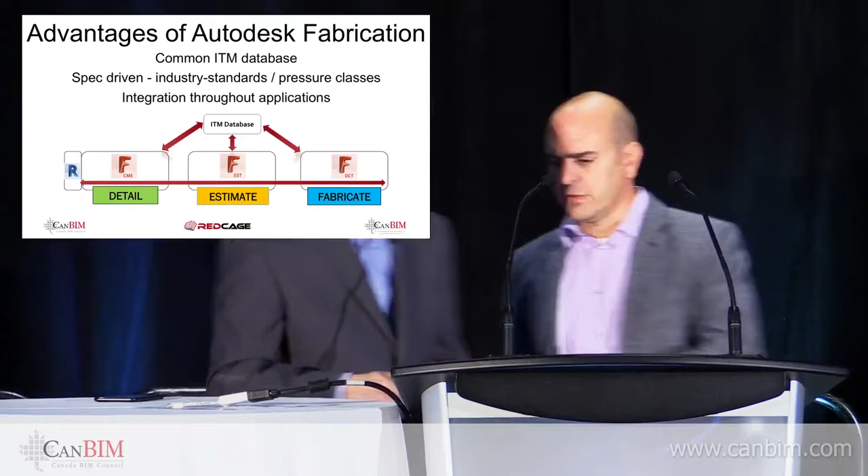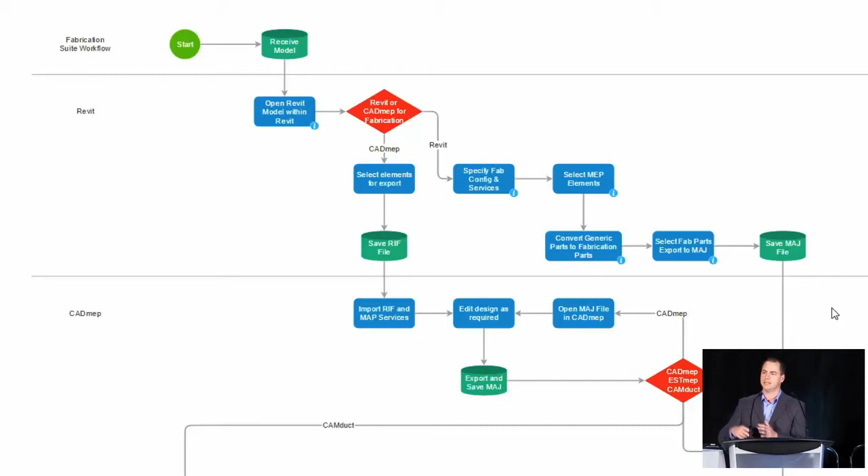So what I'm going to talk about here is the Fabrication Suite workflow, how it gets integrated. You can either use it collectively or independently, so I'll show a bit of both. If you're only an estimator, you could just purchase the estimating side of things. If you're more of a fabricator contractor that uses the detailing side, the estimating side, and the CAM ducting side for fabrication, then you could utilize the whole suite.

So what we have here—oh, it didn't play my video. There's supposed to be a video here, but it's not playing. So I have a video here.

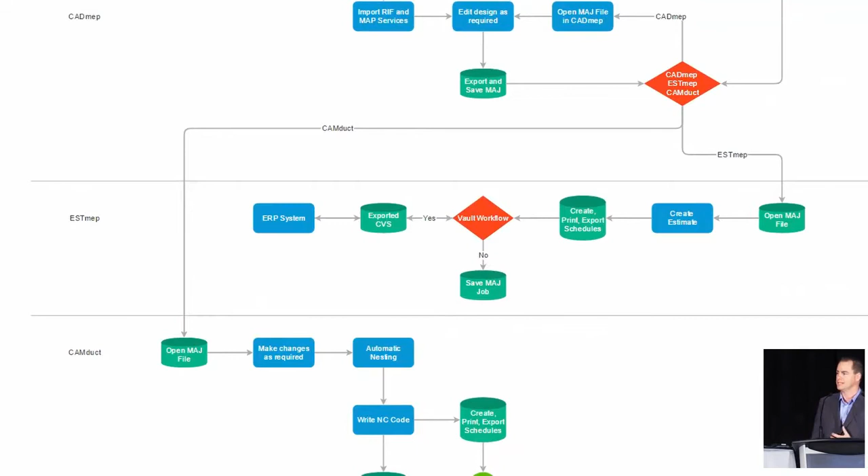Over the time I've worked with some fabrication companies, we've developed a workflow video showing how we can integrate from a Revit workflow to a CAMduct or CADmep workflow to an estimating workflow. What we do is custom tailor these workflows when we work with businesses so they can only focus on one core area. So again, if you're just an estimator, we'd just focus on the estimating side and build a workflow apparent to that.

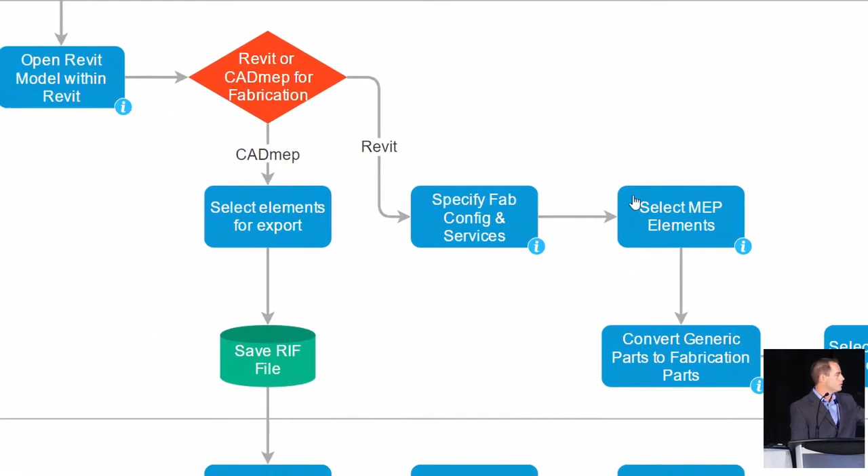This is all cloud-based workflows. If you go into one of these, we'll generate how your users could step by step go through converting fabrication parts and each process of that workflow.

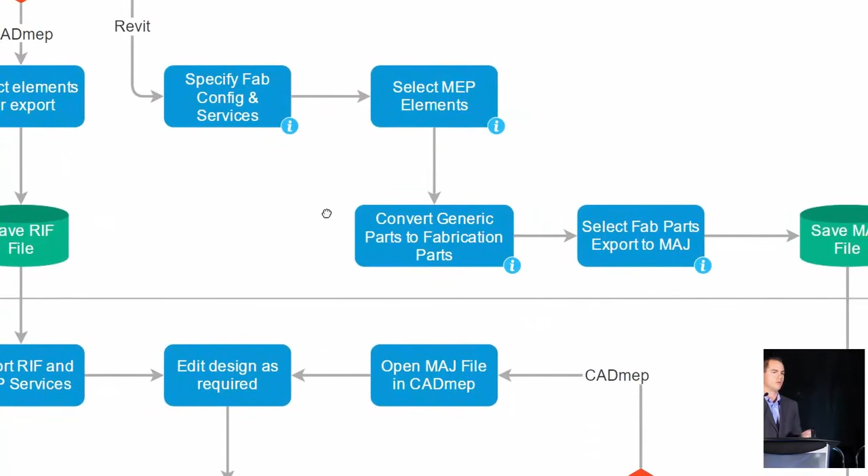So we kind of do this—this is one of the things we do. Instead of just regular CAD training, we do a lot of custom training geared towards your workflows, develop workflows with you, build standards, build templates that will help you propel a lot quicker within your fabrication space.

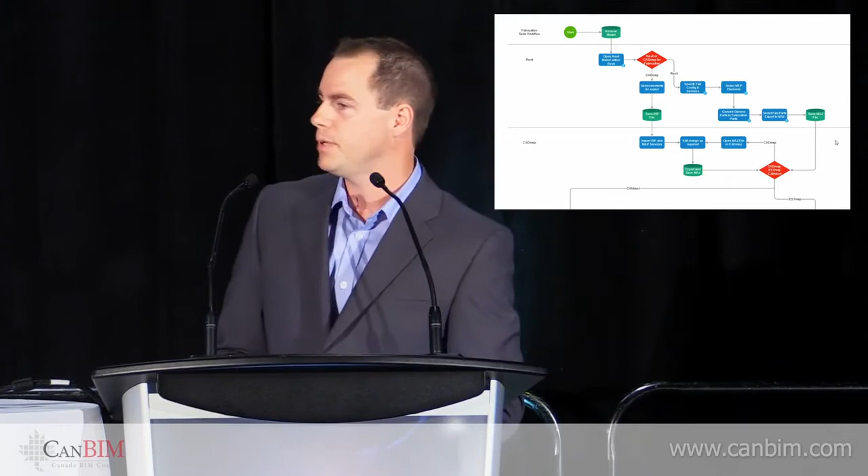The first workflow I'm going to talk about is the Revit Fabrication workflow. Autodesk years back bought a software called MAP Software, and that's where all the ITM database came into play. By buying that software, they're now giving you the ability to create LOD 400 models inside of Revit if you want, or outside of Revit. LOD 400 has been somewhat possible through third-party apps, but not with a tight integration with the Autodesk package. So I'm going to go through laying out, converting, and supporting inside of Revit fabrication.

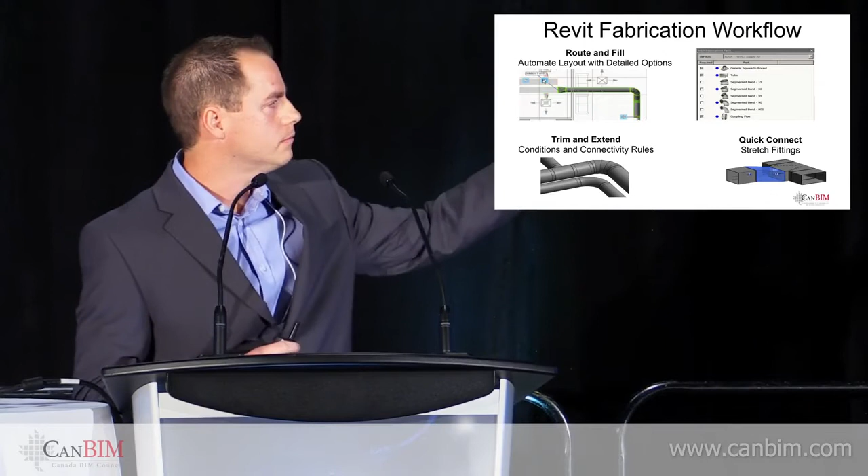Back in 2016, Autodesk put some fabrication tools in Revit, and it got even better in 2017. 2017 gave us the ability to do things like routing and filling based off of a service type, and based off of that route and fill, we can trim, extend, and slowly develop a fabricatable model piece by piece. One huge benefit is it will also connect to regular design ducts, so if you're only focused on maybe a mechanical room, it'll also just connect to that main design duct outside of there if you want.

I think in 2018 we're going to probably see a huge improvement on the fabrication space inside of Revit, and I think that's the direction Autodesk is going, so that might be quite nice to see as well.

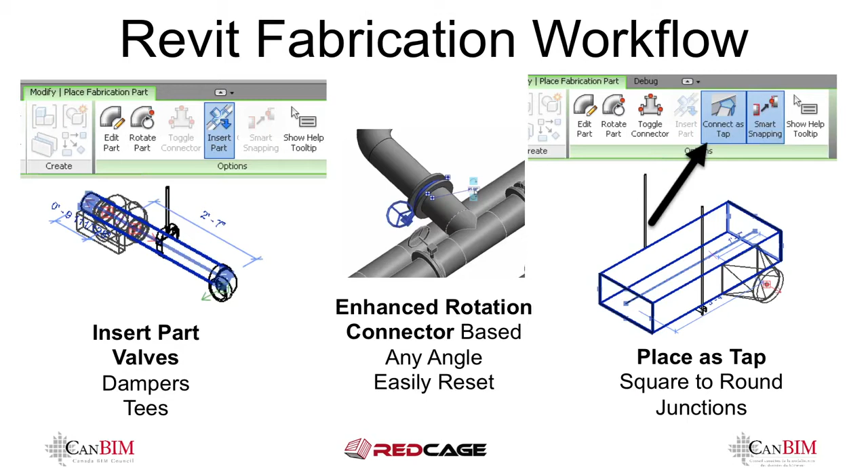We now have the ability to insert parts, and anyone that knows trying to use Revit for some sort of fab process knows inserting a part is quite complicated. You can't rotate a valve easily without cutting a bunch of different views. With the fabrication tools, we can rotate a valve in 1 degree increments if we want, roll it off the pipe or off the duct for the duct fittings and so on. It's a lot smoother process than just throwing a valve inside of Revit.

And the key here is the manufacturer content. They have a content database of 65 different manufacturers, and we can even create our own if we want, using a lot of the parts capabilities inside of CADmep.

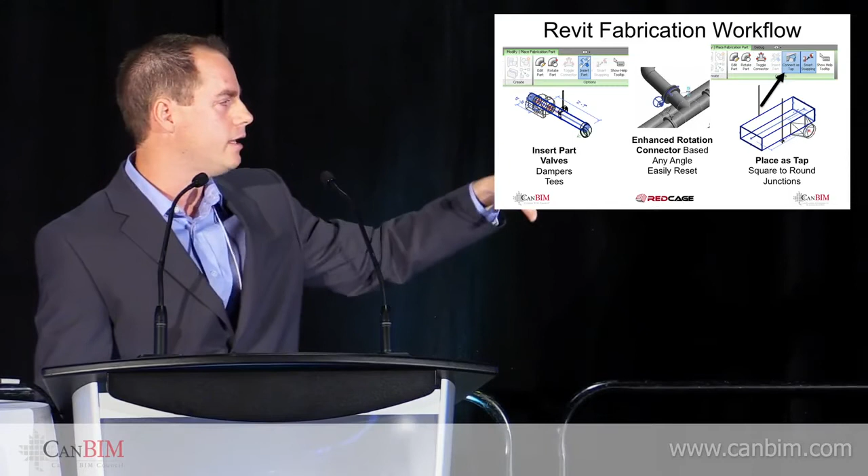The huge benefit here—this workflow mainly is going to be a massive benefit. We've got a lot of fabricators moving towards Revit for this simple reason. If they receive an MEP model from a design company or consulting company, they're quickly taking the design layout of ductwork and piping and converting it to fabricatable parts with just a couple clicks of the mouse. That's going to allow them to take it into that LOD 400 state and then fine-tune the model a little bit more.

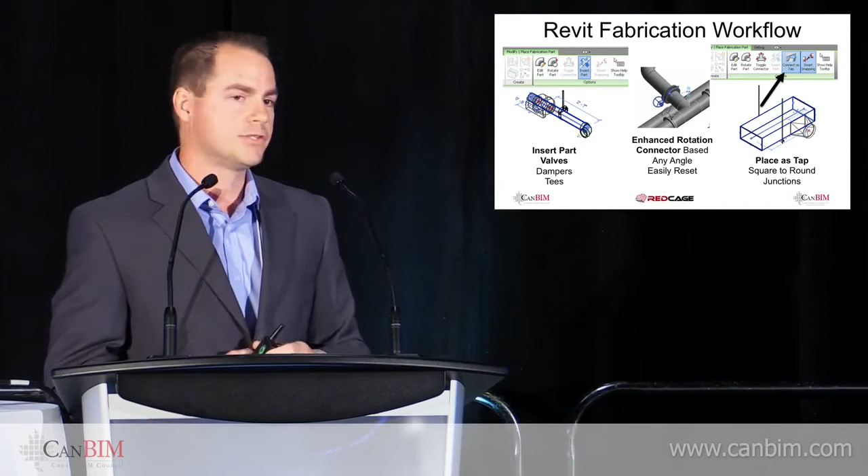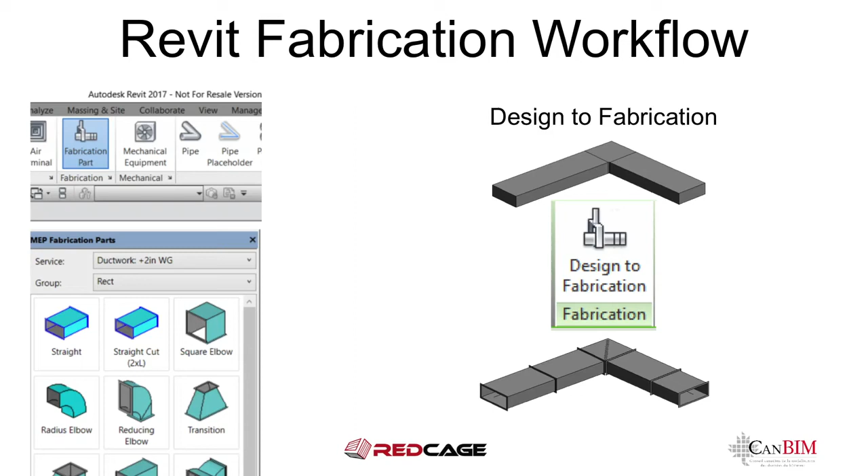If they're not receiving a BIM model—because a lot of consultants, I'm not sure why, maybe not playing nice in the sandbox, want to charge fabricators for this content, for the model and so on—a lot of fabricators are simply just remodeling the building anyways. They'll refabricate it using Revit as the starting point. So whether or not they're getting the model, there's a workflow either way. And if you're an engineering firm and you want to go to this level of detail with truly mechanical manufacturer spec stuff, you could do that as well.

Lastly, one of the things that allows us to do here inside of Revit is to optimize our ducts. So if you draw a fabrication duct, you want to optimize it to be its proper cut lengths for the fabricator, for the sheet metal contractor. They can quickly take this into CAMduct and start to cut it on their machines. You can see we can extend elbows, make transitions, stuff you can't do in Revit that takes a lot of time. Especially extending those elbows would really require a custom fitting. So it's quite nice, some of the tools that I have.

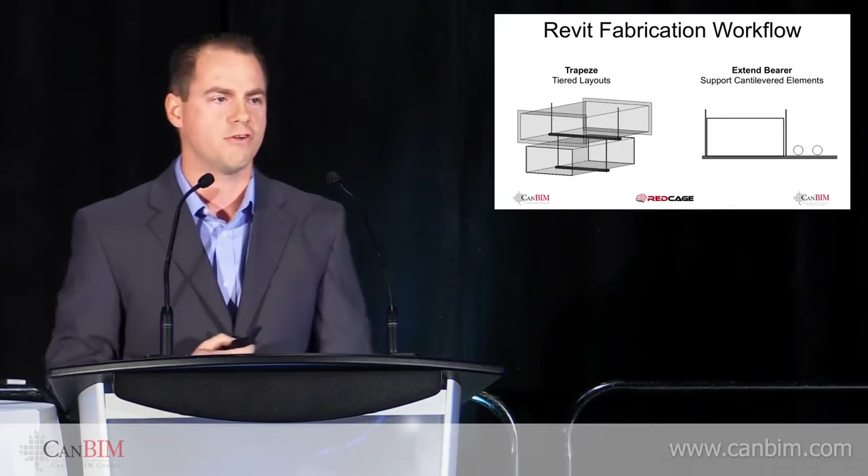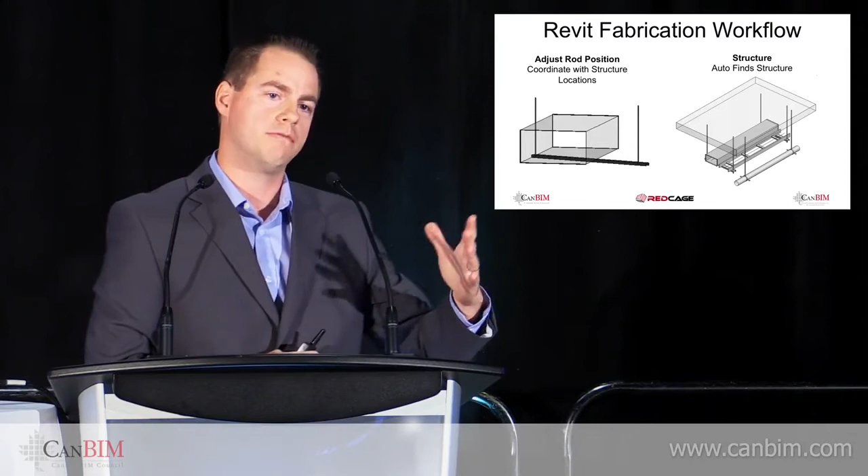It also supports pipe hangers, duct hangers, cable trays, and conduit hangers. Inside of Revit now for fabrication, we can connect hangers to other hangers, cantilever hangers, even attach hangers automatically to structure. So if there's a structure above from the engineer and it's a linked model, we add some hangers and they'll automatically find the structure above. From that point, you can go into a point layout workflow and start to lay out all the points where those hangers are for building on site. Quite powerful features we've got going on for that.

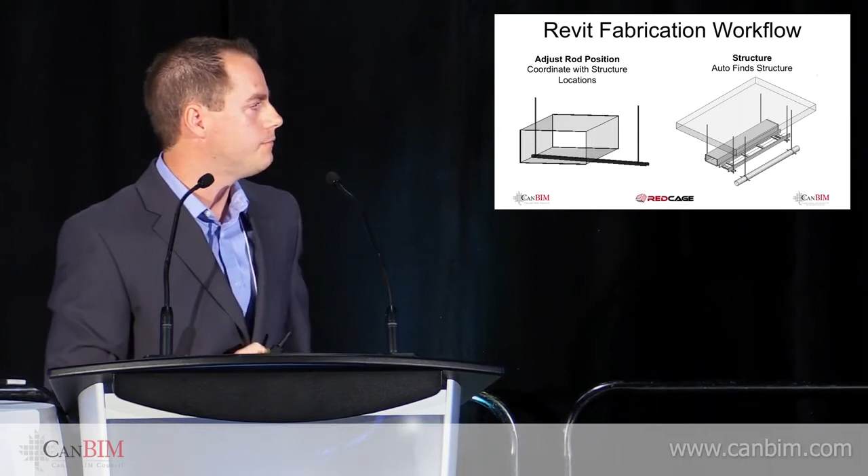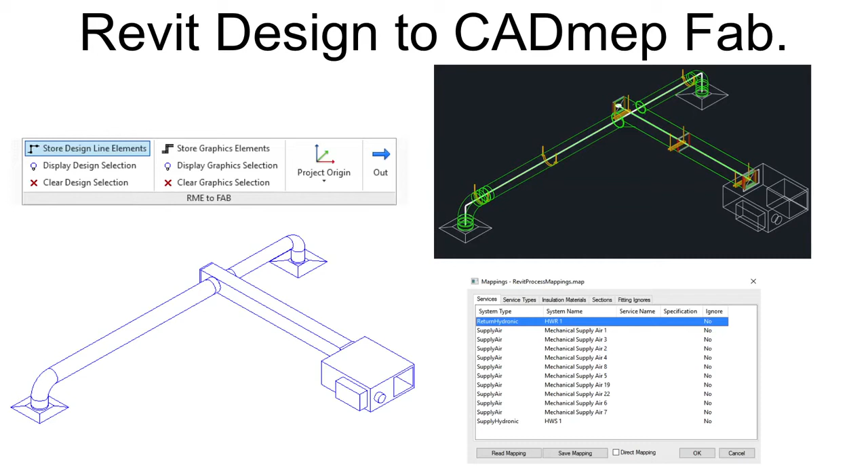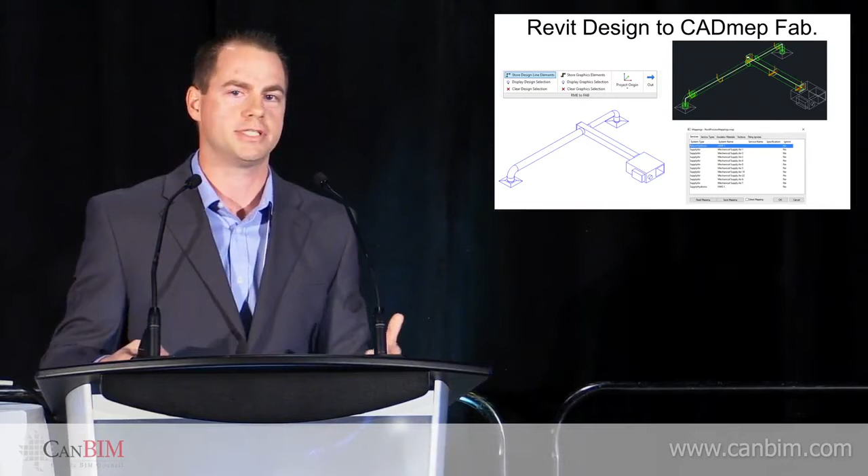So there's a workflow there, or if they're receiving a model and they're more comfortable in CAD MEP — let's face it, not everyone has BIM users or Revit users. A lot of them are still CAD operators today, but they know the process in 3D CAD, so that's a workflow they can go to, and we can eventually branch them to that Revit workflow, which is quite nice.

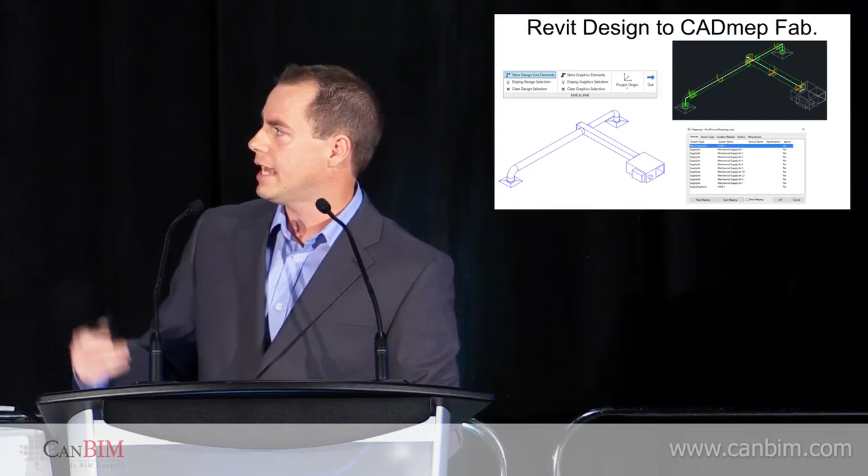When you take it into a CAD MEP workflow — after it comes from Revit, you get these things called design lines. Those are the single lines up there, and design lines can be converted to any service type, a supply line, a return line, whatever, and it'll apply that spec to that design line. You can add additional design lines quite quickly, and modify them if you need to, but that design line is quite powerful in the CAD MEP world for those detailers, because they can just work in single line and convert to 3D if they want. So that's one of the workflows they'll use as well.

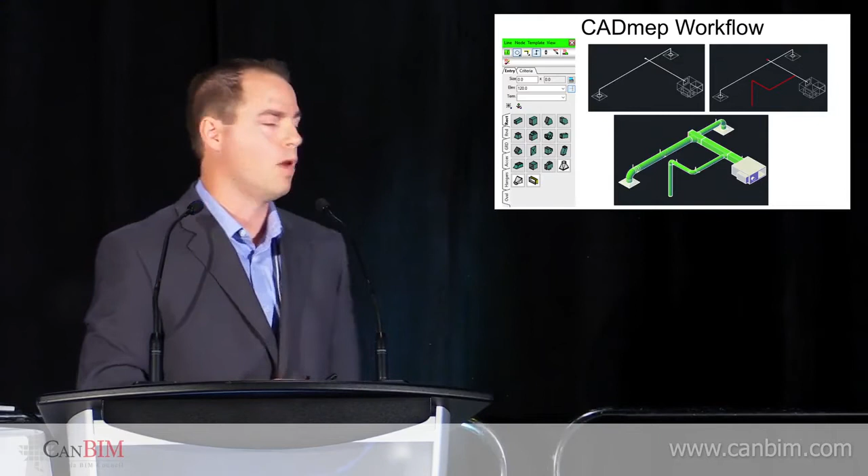What you see on the left here is just the design line and the spec being pulled for modeling purposes. And who says Revit can't spool? It's been a pain point question year over year — you know, Revit can't spool. Well, Revit can spool. There's a bit of a workflow to that.

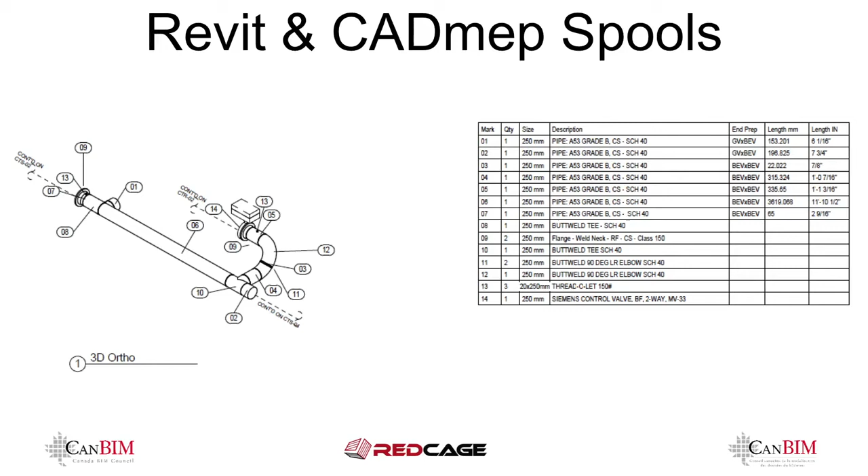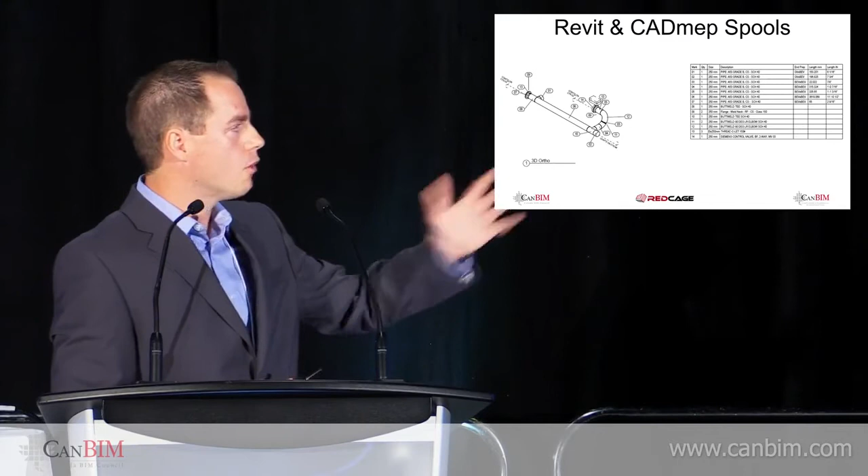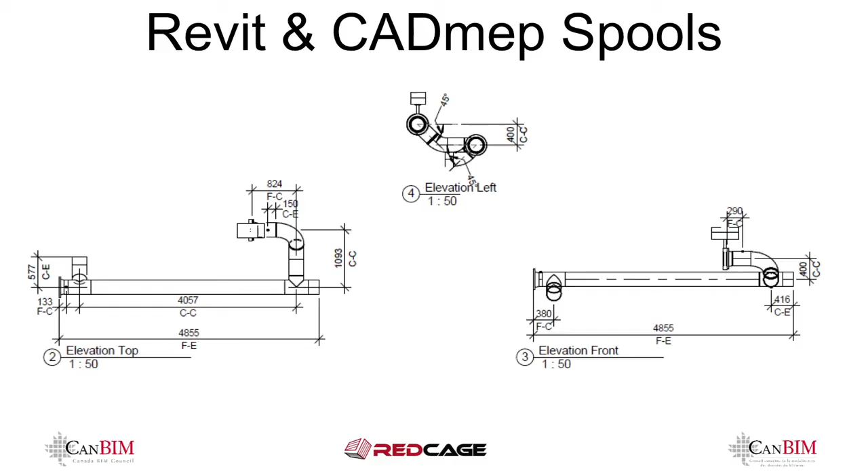So if you're more comfortable and want to take your models and spool in Revit, we can do that — we have a workflow for it. If you want to take your Revit model into CAD MEP and spool there, you could do that as well, or just spool directly in CAD MEP. So there are workflows for it. Everyone always complains that you can't spool in Revit, but you can. We have some of those workflows developed, and that's kind of nice about what we do — I'll sit down with a fabrication company and we'll talk about how they prefer to spool. I'll demonstrate a couple different ways, and then they'll come up with which process they like best.

That brings us to Est MEP. So that was more on the detailing side, and now we come into the estimating side.

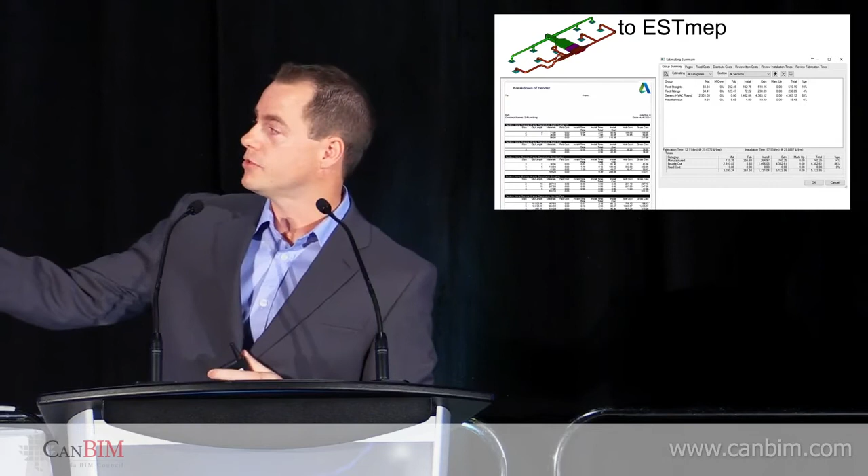If your main focus right now is to bid on a job quite quickly, we could take a Revit model, spit it out to an MAJ file, which is another format, and bring it into Est MEP for really quick estimates. So if you're taking a model from an engineering firm, we can convert it quite quickly to our services and then run an estimate on it based off the price data that you input or downloaded price guides that are currently up to date.

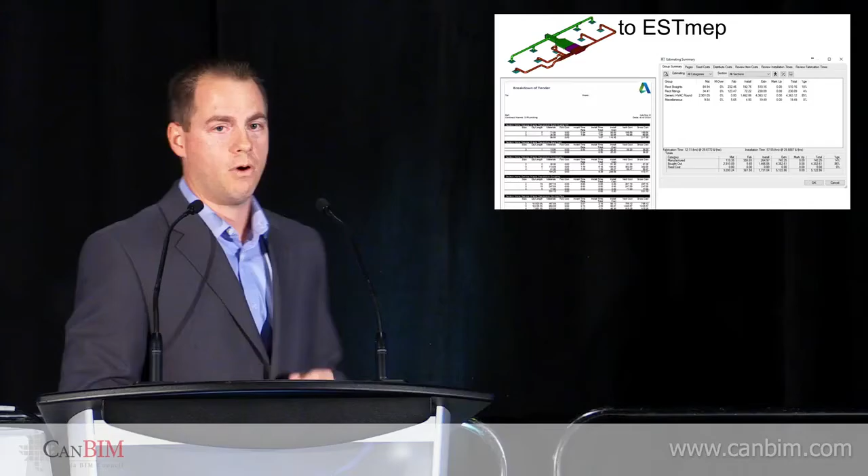You'll get information like labor rates, how long it's going to take to install, what the components are going to cost you, and so on, based off the information that you create. You can generate some reports at the end.

And the biggest thing is that the ITM database, that's the key. So if I make a change to any one of these components here in my estimating world, that will replicate all the way down to my detailing and my fab world, my camming world.

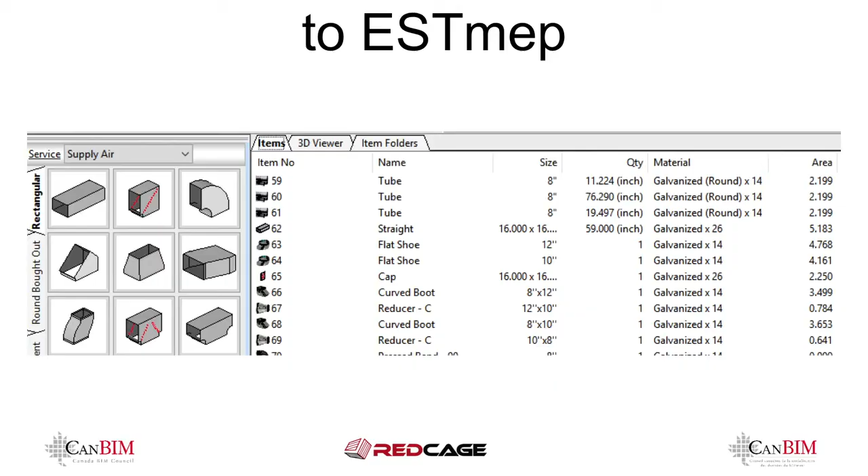After estimating, we can come into maybe a CAM duct. So whether you're a sheet metal fabricator or an all in-house shop, you can now spit out your sheet metal to a CAM duct. And then inside CAM duct, we can auto-nest, and from auto nesting, we can generate our printouts.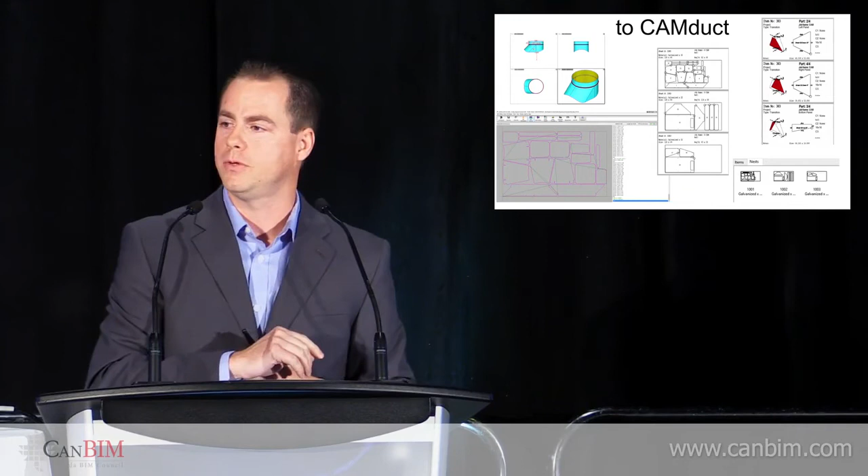So you can print out the part labels, barcoding labels, put that barcoding label onto a component, scan it with your phone using Tracker, and then find out when it actually gets delivered to site. And then they can scan it at site, and then you can know that that object has been delivered.

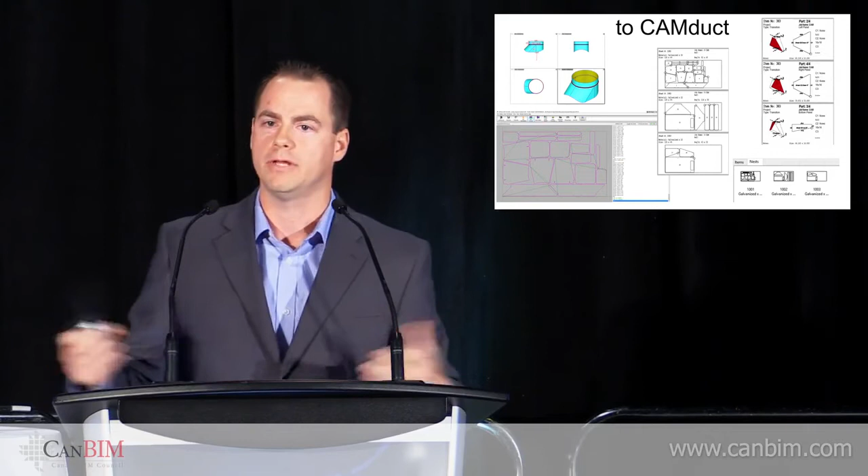So a lot of these labels are auto-generated, auto-created with CAMduct, and we can just spit them in. Again, it's that one workflow. If the CAM guy decides to make a change to a tap or a fitting of some sort, that will again get replicated throughout the suite of software.

So what happens when we go back to Revit? Well, there are lots of methods. We can export Revit, like I said, to an MAJ file format that is read by the whole suite. That's the key right there.

And from any modification we make in a detailed environment, in Revit, in CAD MEP or further, we can actually bring it back into Revit.

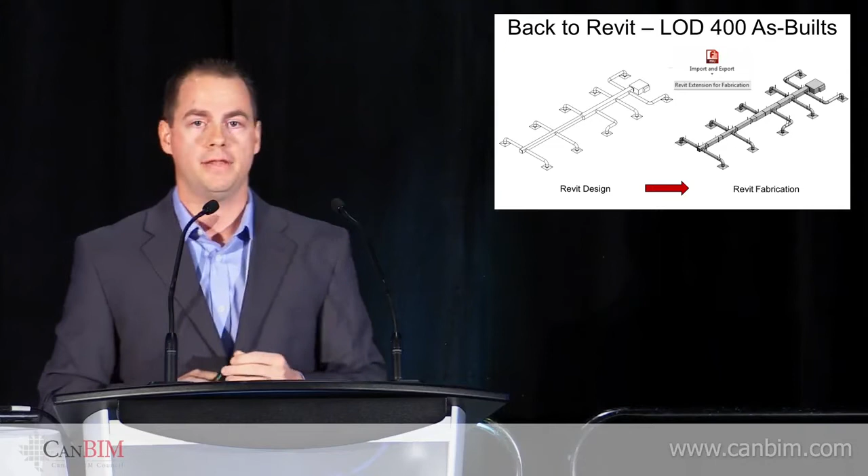So this image here is a design setup prior to spitting out to detailing or design to fabrication. And then to the right is the actual as-built or final completed model back into Revit. And at the end of the day, if you want LOD 400, this is a great workflow. You can get that inside of Revit and then hand that over to the owner if you want.

Autodesk does have a website where you can go and download a lot of manufacturers' content. They are ITMs. If the ITMs are not available inside of CAD MEP, we have hundreds of different make part specs that we can build our own parts from if we need to.

It's way easier than building a family in Revit, to be honest, and 1,000 times easier than creating a 3D model in CAD. So we could always do that if we want to, or we can download the actual content ourselves.

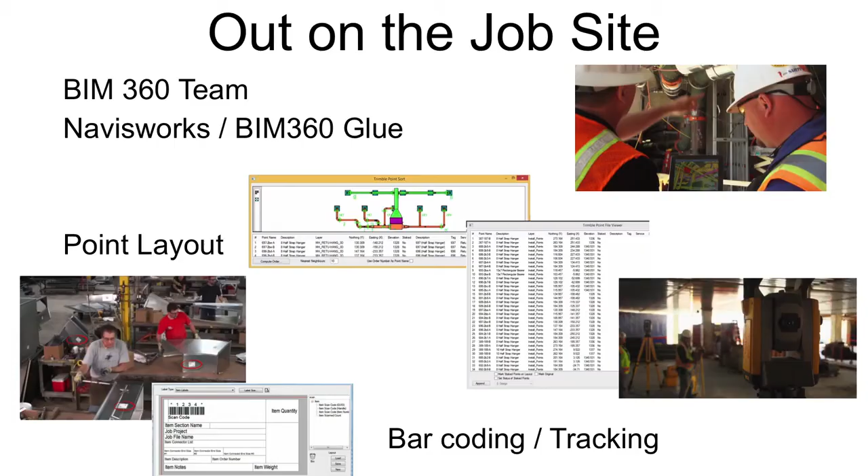Through some of the technology that's there from Autodesk through BIM 360 Team, Navisworks, and Glue, we can bring the model out into the field and actually use it as a resource through the construction process. So the image up in the top right there is showing individuals on site with a tablet, and they're validating or verifying what's going on and how it's being built according to the model.

Point layout, Bill touched on that. At the plasma cutter and the folding tables, you can barcode stuff. The point layout allows you to bring the data points off of the model from the hangers and so on, and we would be able to use a surveying head there to locate those points out on the field accurately to the model.

That also helps the LOD 400 aspect of the as-built model, coming back with accurate information according to where it's been laid out in the field. And the barcoding and tracking is where the barcode labels can be scanned when they're leaving the shop, transported out to the site, and then scanned once they're installed and in place. So again, just validating the whole process and making sure that what's been manufactured, detailed, and fabricated gets out and is installed in the correct location as the workflow goes through and the construction occurs.

So just talking a little bit about prefabrication and modularization. When we talk about this type of workflow and bringing more of the construction tasks onto a shop floor, it allows us to look at this from more of a manufactured standpoint in the shop, rather than piecemealing it together as the project comes together on site.

Rather than somebody going out and measuring, saying 'I need this length of pipe here,' then going back to the job site shop to cut that piece of pipe and bringing it back out to fit it in place, with prefabrication and all the technology we have at our fingertips, we should be able to bring this stuff into a controlled environment on a shop floor and get it produced a lot better, more efficiently, and more safely.